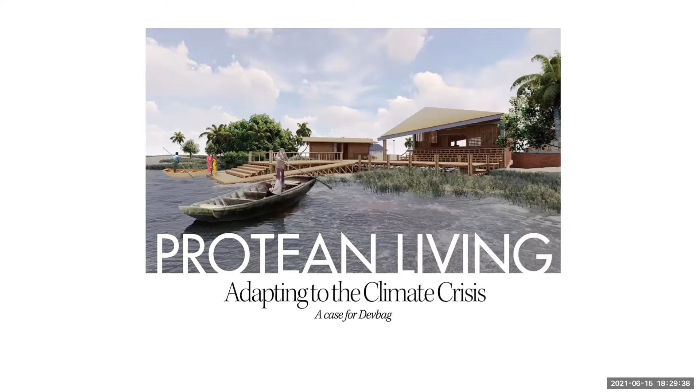The topic of my dissertation is protean living, adapting to the climate crisis, a case for Devbag. In my dissertation, I look at the climate crisis and its impact on coastal villages and adaptation to these new changes, particularly the role design will play in it.

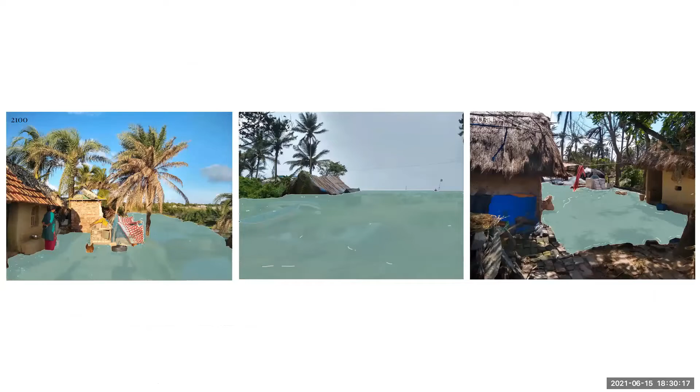India has about 7,500 kilometers of coastline that is vulnerable to seawater ingression, loss of land, life, property, and livelihood. The increasing frequency of cyclones in the Arabian Sea is a grave cause of concern. There are many villages that line the coast that are very vulnerable to this. These villages are on the front lines of this crisis. They face challenges of surviving and developing within ever changing parameters set by a new normal.

To understand and mitigate the impacts of the climate crisis, I have taken the case of a small peninsular village, Devbag, in Maharashtra, which is representative of so many villages that line the coastline. Devbag is situated on a 3.5-kilometer long extended piece of land that projects from Tarkarli. As you can see, to its east is the Karli River, and to its west is the Arabian Sea.

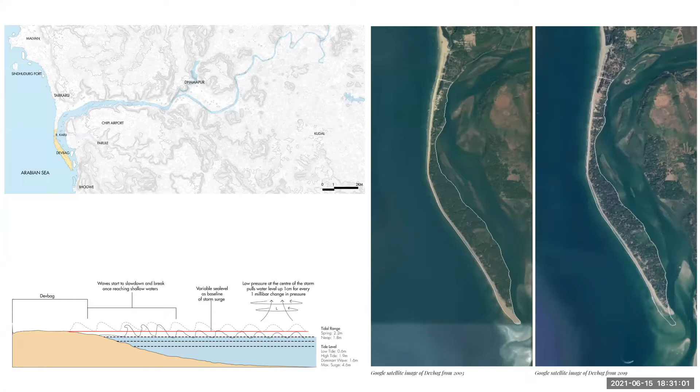Devbag was originally a fishing village, which in the last decade or so has turned its economic base towards tourism. The village is at an approximate elevation of 5 meters above the mean sea level. This means that it is very susceptible to the rising sea levels. Along with that, Devbag has also seen a steep increase in the number of environmental events and the destruction that ensues.

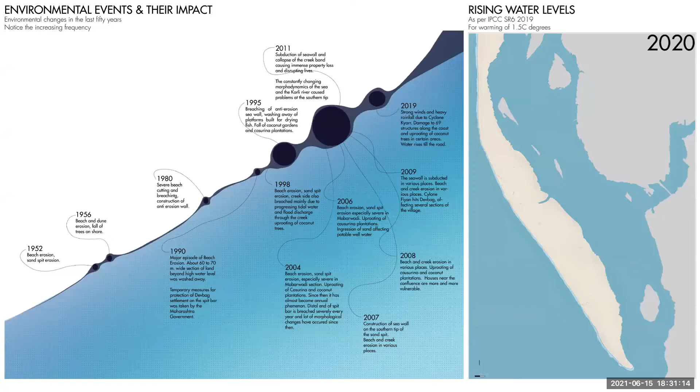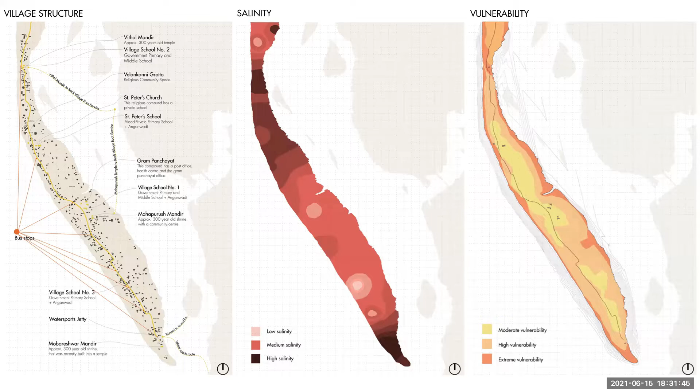To begin my analysis, I mapped out the rising sea levels as per the IPCC Special Report 6 for a warming of 1.5 degrees Celsius. I looked at all the important landmarks and public buildings in the village and their overall location to understand the structural and mobility spine. Apart from the land loss, seawater ingression also causes an increase in soil salinity, which is detrimental to both the groundwater table and the vegetation that grows in it. Now, taking land loss, salinity, and infrastructure into account, I then generated a vulnerability mapping for the village, which has helped me identify the potential sites for intervention.

Now, what we have to understand is that this breakdown is a process whose outcome is unknown. It is unlikely that we'll be able to limit the warming to 1.5 degrees Celsius. I'm therefore designing for a situation with no precedent. Adaptation to it, therefore, has to be polyvalent. So, the first questions that plagued me were of durability and functionality of structures, especially what purpose they would serve and how they would react. Taking cues from the village itself, I realized that these people have been living with water for centuries, and that is a philosophy that could be easily adaptable.

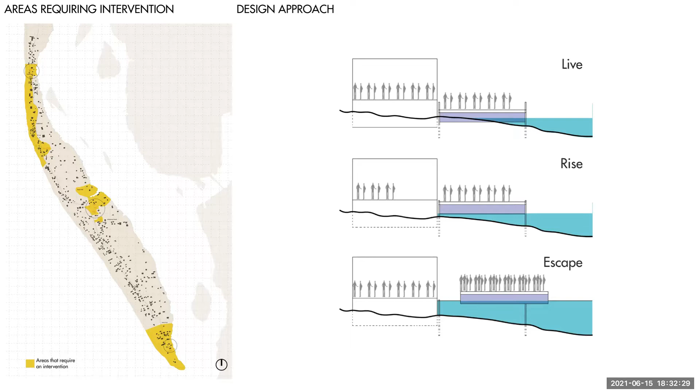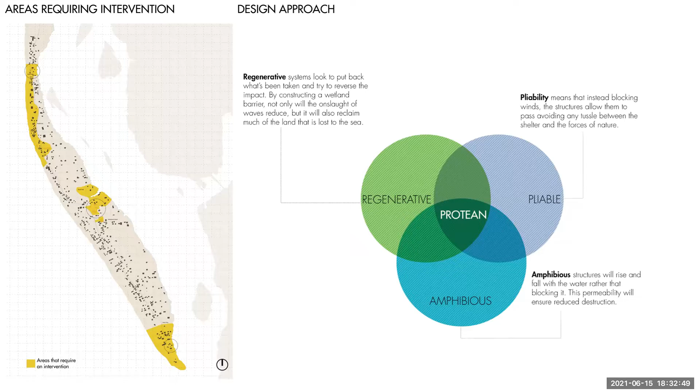The proposal therefore looks at the idea of protean living, which in simple words means ever changing. It incorporates the ideas of regenerative systems, pliability of structures, and amphibious buildings to propose a design that modifies and enhances existing public infrastructure in the village to make it resilient and for it to act as a shelter when disaster strikes and to function as a refuge when time comes for migration. And since I'm looking at anticipatory design strategies rather than reactive design strategies, I look at two aspects of resiliency. One is the overall resiliency, and the other is local resiliency.

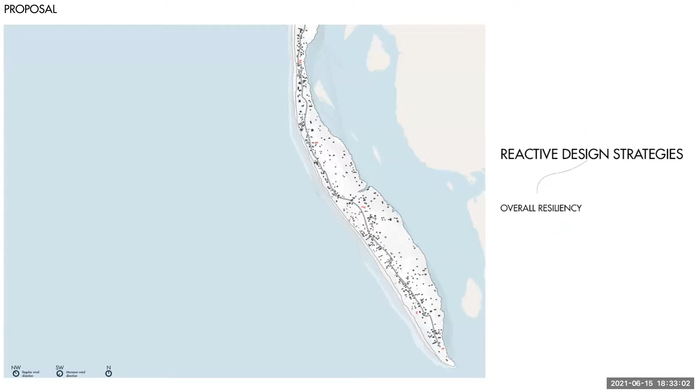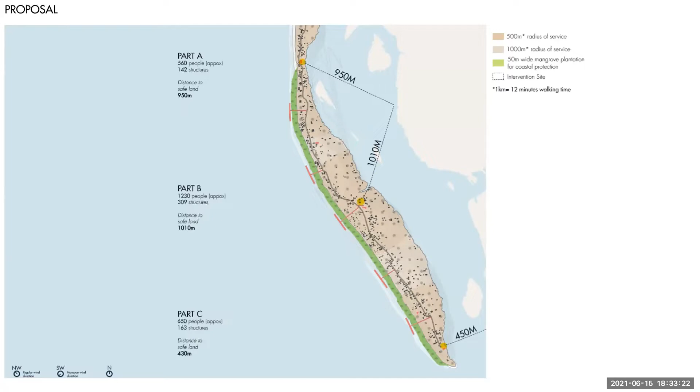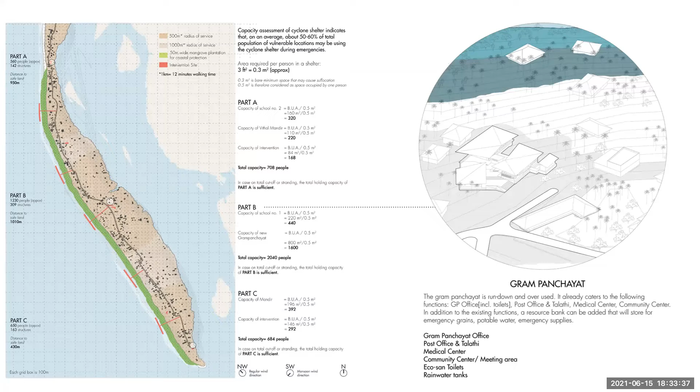The proposal has two aspects. First, I propose a wetland barrier across the entire western edge of the village. The second part is the division of the village into three parts of 10 to 12 minutes of walking distance from the previously identified public structures. These public structures are situated at the highest ground in that region and will act as evacuation points. In part A, I propose a community center near Vithal Mandir. In part B, I propose a Gram Panchayat and another primary school. And in part C, I propose a tourist center on a vacant piece of government land.

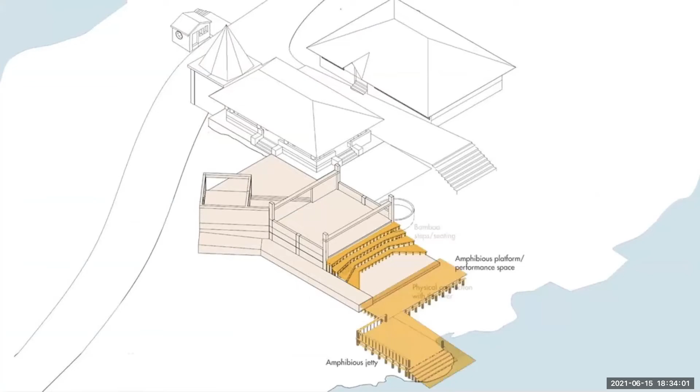Now, coming to part A is a community center that is proposed near the Vithal Mandir. At present, there's an under construction community center adjacent to the Vithal Mandir. I propose modifications to this center. I believe that the new center with the temple and a four-room kitchen will be very efficient as a refuge and an evacuation point. In my design, I've utilized the existing plinth. Now, since the existing plinth is very high, I used the underlying volume to fit a rainwater harvesting tank in it. After extending the temple plinth, part of the structure was rotated slightly in order to minimize the surface area subjected to high wind pressures.

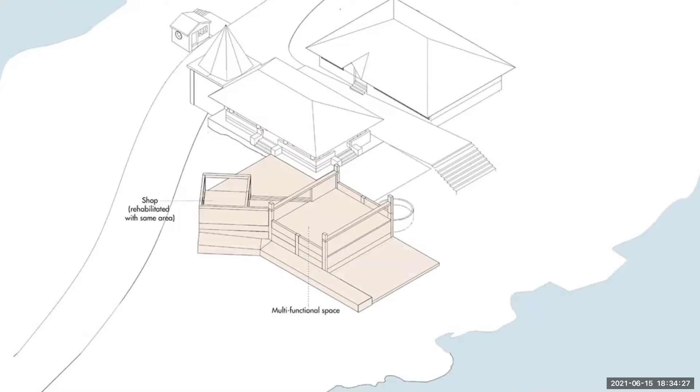I've extended the plinth on the side of the river so that it creates a physical connection and the existing shop is integrated into the new structure. The bamboo steps will act as both a seating and a connector to the river edge, and an amphibious platform that serves as a performance space and a floating device during surges is also added. The jetty is amphibious in order to rise and fall with the tides of the river. And there's an EcoSan public toilet connected to the platform, which can be utilized by both the users of the jetty and that of the community center.

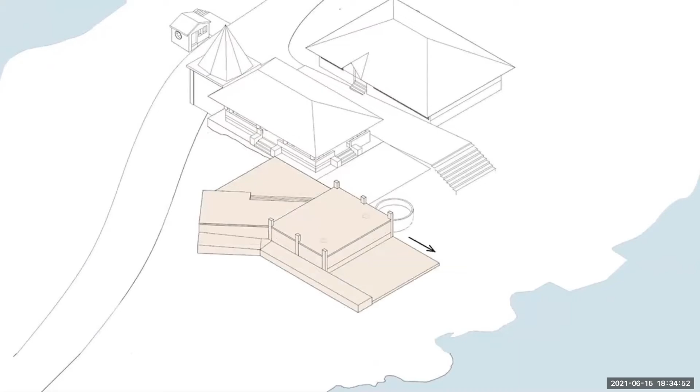The superstructure is made out of bamboo and is lighter than a traditional structure. It supports and anchors the aerodynamic roof, which has been designed to sustain high pressure winds. The overall planning of the area, as you can see, the space is quite flexible and accommodating of any function that is to be carried out.

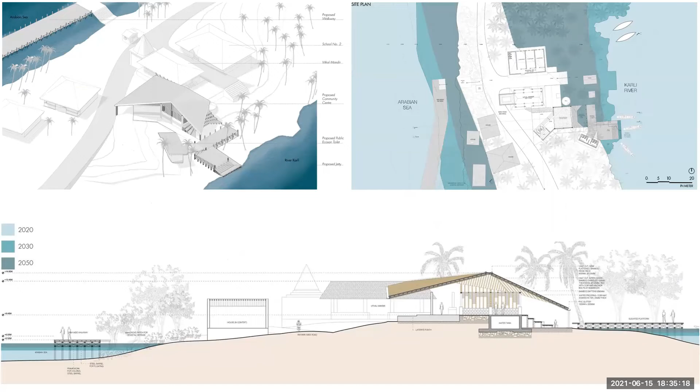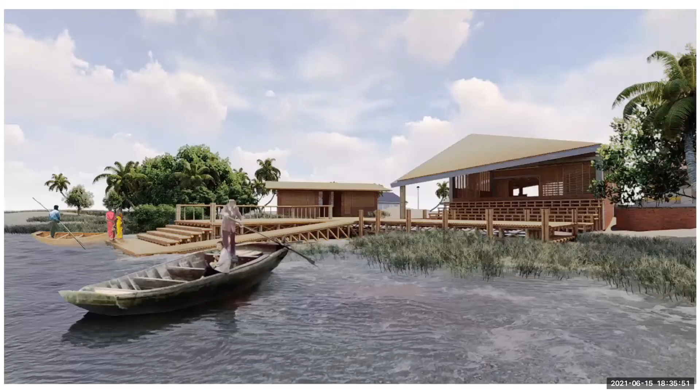And I also performed the structural analysis on the roof in order to understand whether it would sustain high pressure situations. Now, coming to part B. Part B is an intervention at the highest point in the mid village. I propose to rebuild a new polyvalent Gram Panchayat instead of the existing one.

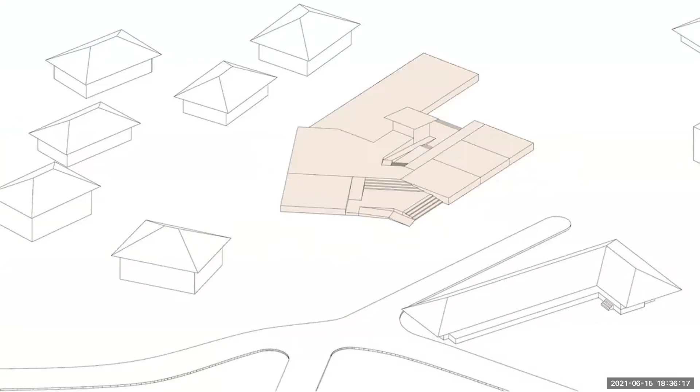The Gram Panchayat also functions together with a five-room school to act as a refuge and as an evacuation point. The Gram Panchayat is constructed on 8 underground rainwater harvesting tanks, and the finished plinth is about 13 meters above the mean sea level. Now, all of this has been done by keeping in mind the guidelines for storm surges.

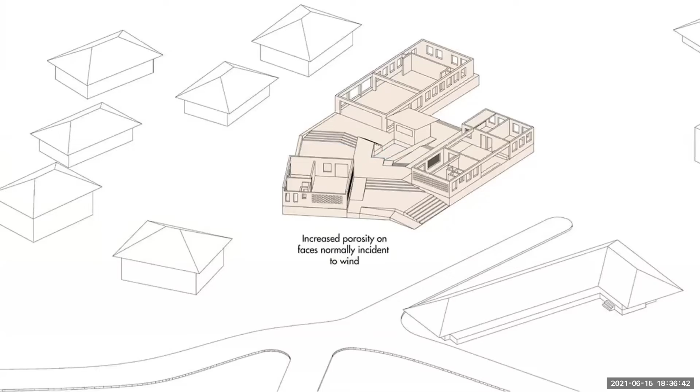The zoning is done by using the shrine that exists at the core, and the structures are made to correspond to it, as well as they've been aligned in the direction of the prominent winds. The area of the previous medical center was grossly insufficient, so that has been increased, and the medical now opens into a buffer area which can be used as a waiting area or a space to host medical camps or as an additional holding space during times of refuge.

There's a depression that is created between the two buildings of the community hall and the Gram Panchayat office. The depression functions as a water retention area in monsoons and as a gathering space otherwise. So this is how the volumes look. And the community center itself is a multifunctional space that can be broken into different spaces, or it can function as one continuous space.

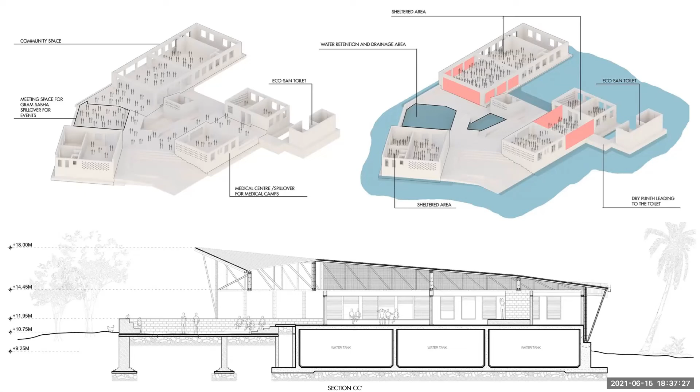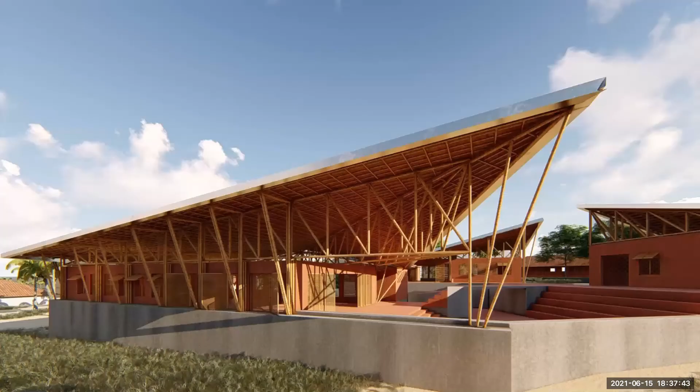Now, again, this has been done in order to maximize the area of utilization during times of relief. The structure is designed to function in a way where it retreats from the storm and then it blooms in the sun. These are again some working details for pliability of the structure. And for the overall aspect around the complex, the process of phytoremediation can be used where grass and shrub varieties that extract salt from the soil can be used to improve groundwater table over the years.

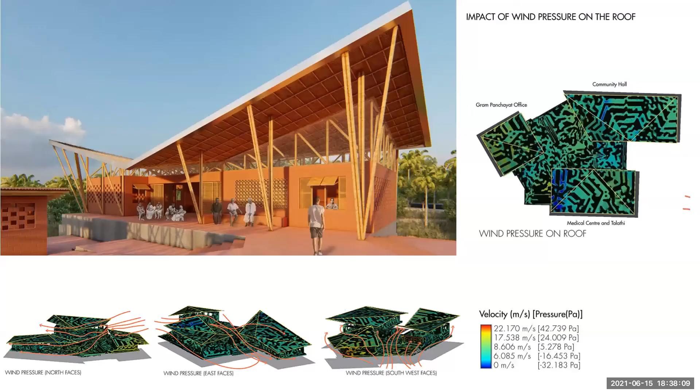Again, this is a view of the medical center and the Talathi, and these are the wind analysis models for the Gram Panchayat. Now, coming to Part C. Part C is a tourist center that is located at Mobor. This is a vacant piece of government land that is currently being used for tourist parking, but it has great potential to be turned into a more formalized space.

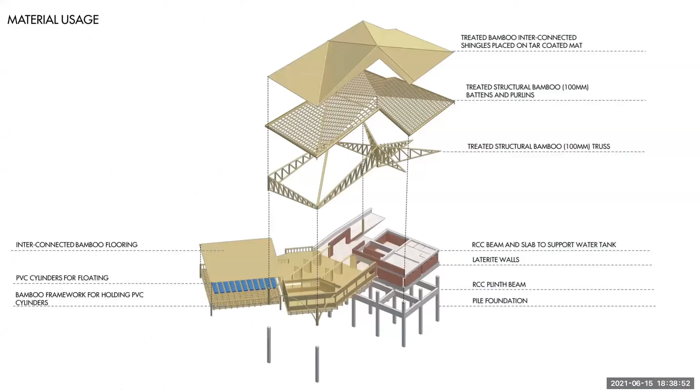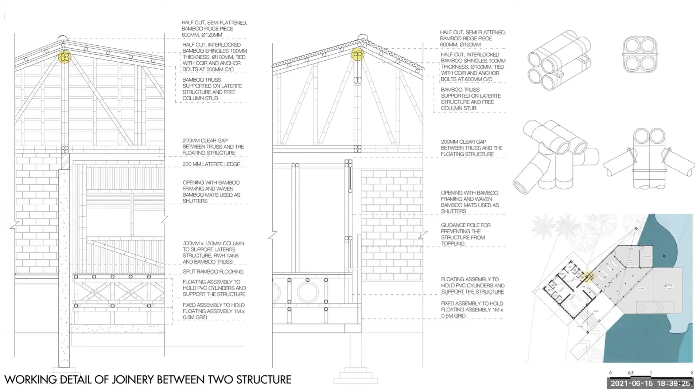So these are actually two different structures. One of the structures is deeply rooted into the ground and is made out of laterite, and the other is amphibious and floating. The orientation of the building is with respect to the prominent winds, and there's a clear pathway from the road towards the water. The passage to the jetty also doubles as a viewing deck. Again, these are some details to explain how the structures will rise and fall. And these are some of the views of how it would look.

Now, coming to the overall resiliency, the overall resiliency looks at a 15-meter wide mangrove plantation. In order to not take away from the water, a 6-meter wide walkway is constructed on the outer edges. Access to this walkway is at 500-meter intervals from the spinal road. The walkway is constructed in treated bamboo and timber and will be amphibious in nature. This means that it will rise and fall with the tidal frequency of the sea. I envision it to be used as a promenade and as a boat anchoring system.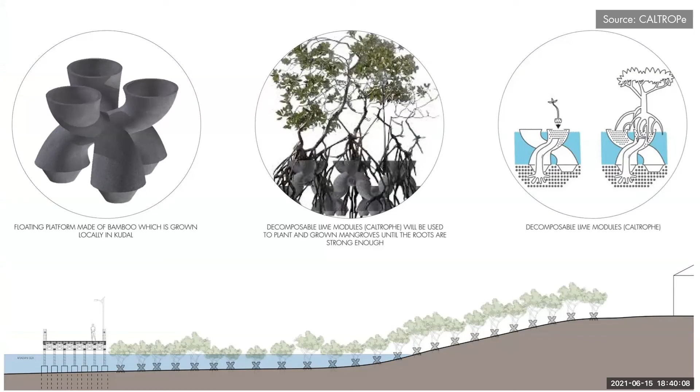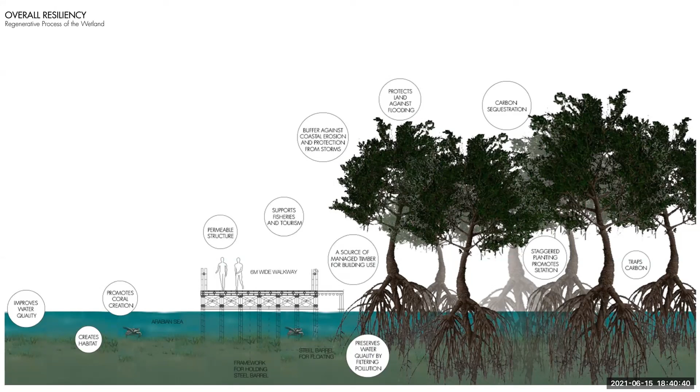And the mangrove stretch is a main element of the proposal. The wetland is deeply rooted in the idea of regenerative systems, which means that not only will they react to the challenges of these changes in the environment, but they will also try to minimize it. So it will function as a carbon sequestration system and absorb carbon. It will promote coral growth and provide a habitat for fish, along with improving water quality. And this in turn will promote both the economic and ecological resiliency of the village.

All in all, I would like to conclude by saying that the climate crisis is going to be the greatest challenge of our generation. It will exacerbate existing inequalities and create new ones. In order for us to combat and overcome the crisis, we need to look at inclusive design strategies that will penetrate through strata and provide a fair chance at survival to all.